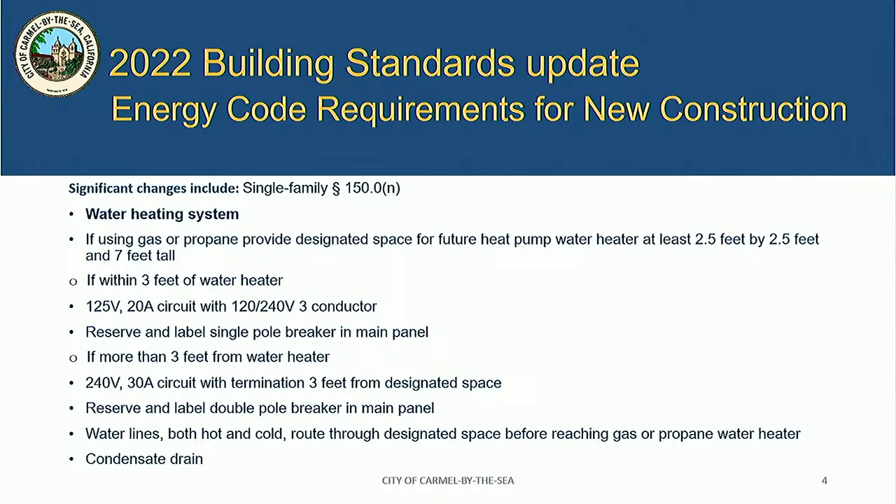This is significant because, one, if you're doing a new ADU and your current panel isn't a minimum 225 amp bus bar rating, most likely you will be required to upgrade that panel. That panel will trigger the electrical underground requirement, which I'll get into in a moment. But this is the biggest portion of the electric ready requirements.

You'll also have to install the raceway for the energy storage system, your backup battery. Backup battery isn't required upon building the project, but you do have to dedicate that space for this.

The main reason I'm bringing all this up is when you're planning your project, you have to think logistically between setbacks, window locations, because of the required setbacks for your future energy storage systems or any of the equipment installed on the property. It could really affect how you design that project.

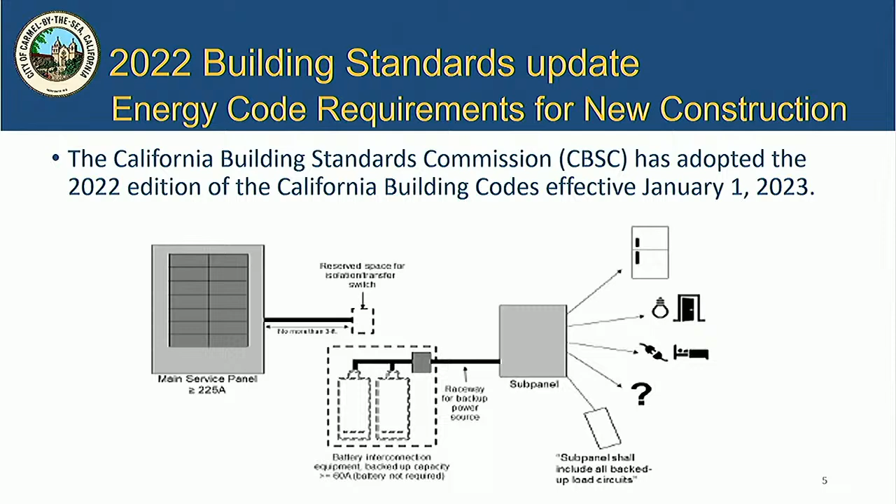And if you don't have the foresight, it could result in delays in the project if revisions have to be submitted. And we're all trying to get these projects to completion as soon as possible.

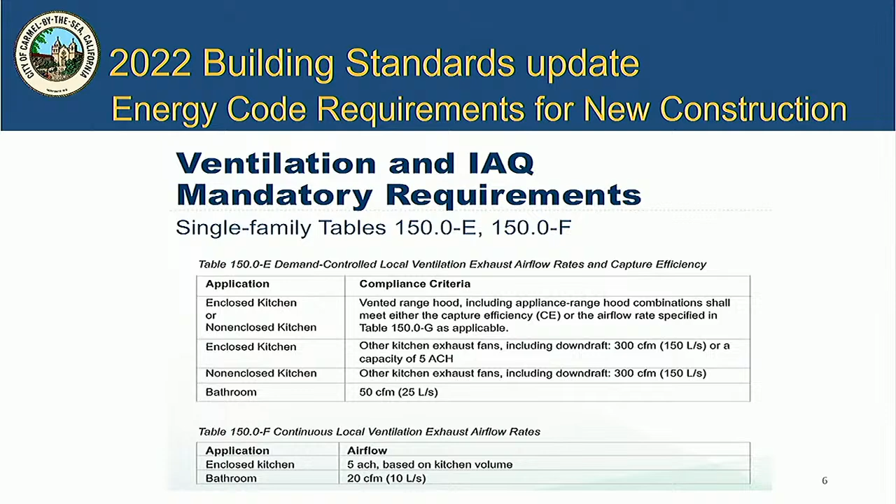This next diagram shows you, depending on your dwelling unit square footage, whether you have an electric range or a gas range, the minimum CFM or capture efficiency requirements required by the code.

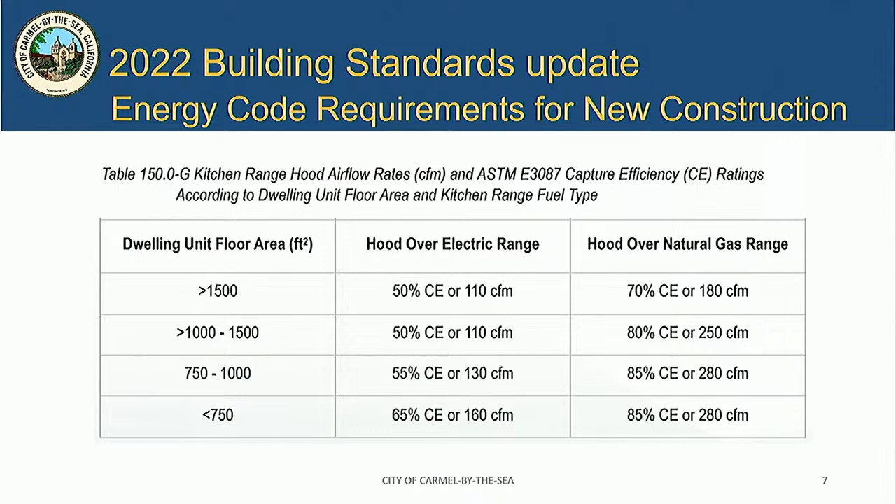So I wanted to talk about the changes. There was a change in the municipal code. This has been in effect over a year, but I did want to cover this because it more clearly defines the definition for demolition.

Previously in the past, if you're in the county, lineal wall calculations were typically calculated by the framing that's removed. I just want everybody to be aware that when we're looking at plan checks, we do the linear wall calculation by the percentage of sheetrock that is removed.

Typically, if you're removing over 50% of the sheetrock in the house, you can expect the sprinkler requirement to kick in if the residence isn't already fire sprinklered.

I'm bringing this up just so people are aware of this, because we don't want to get into the project and then cross that 50% threshold, and then have to submit a revision or start the plans for fire sprinklers, which can significantly delay that project.

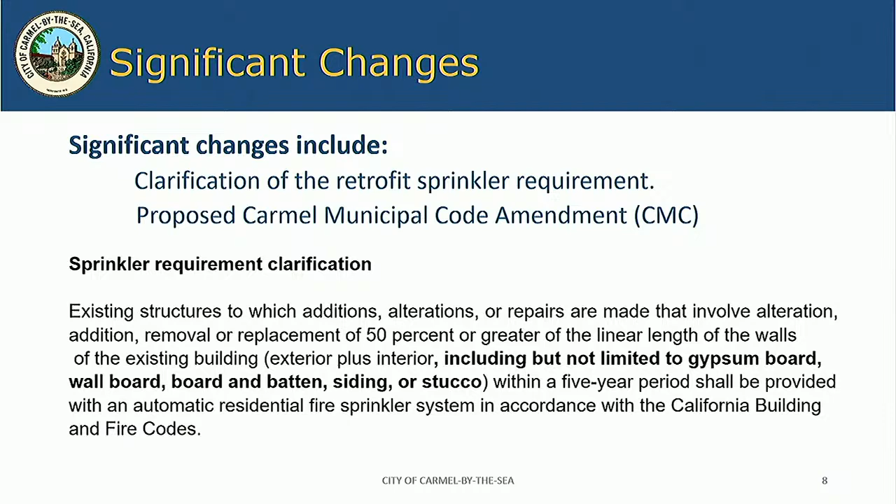There's also a change that's been in effect for over a year in the municipal code for the electrical undergrounding requirements. Really, the only change is that the $200,000 threshold that requires the electrical undergrounding. The whole code is not in here, there's a couple exceptions, but...

If you have a project and it's under $200,000, let's say you're going to do a kitchen or bath remodel and you upgrade that electrical panel. If that house is sold and the new homeowners decide they want to do a more expansive project, or even in cases I've seen the new homeowners don't like the new kitchen and bathroom, so they rip those out and redo them. If the panel has already been changed in the previous 5 years, and that kitchen bath remodel crosses the $200,000 threshold, retroactively, if that main electrical service isn't already underground, it will be required to go underground at that point.

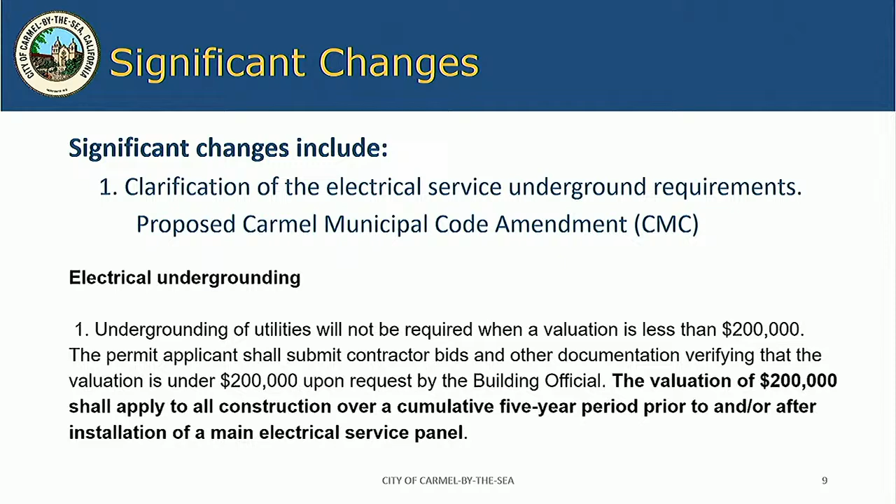Because we've been having a lot of storms lately, and this has become an annual thing, with trees coming down and storm damage needing to be repaired, we're trying to expedite these so that we can get homeowners back into their homes if they have to leave because of damage to the houses. These are the minimum requirements just to get a permit issued, so we can start getting homeowners in the process of being able to rebuild and get back in.

So at the minimum, you need a site plan, basically not a specific floor plan, but at the very least the outline of the house. If you have some structural damage or damage to a specific wall, we're just trying to identify that wall or the roof area, whatever it may be, that's damaged. And obviously providing photos always helps. That way we can get an exploratory demo permit issued.

In that process, before things are covered up or opened up, before we get to the time of rebuilding, we want to have the inspector out just to see the extent of the damage. Engineering may be required, that's a case-by-case basis. But at the end of the day, we want to have the inspector out to see the extent of the damage before we start doing the repairs.

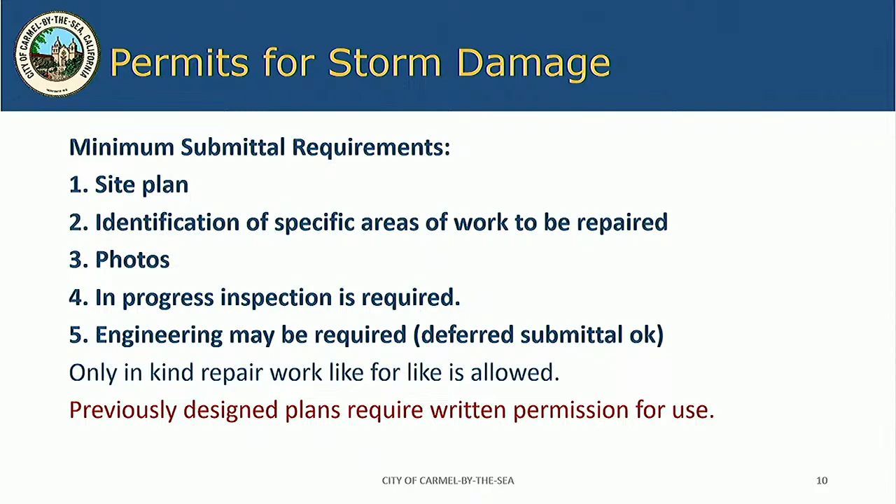Okay, now I just want to quickly go over some of the checklists that we now have available and upgraded. I have to give a lot of credit to Dwayne, he did the heavy lifting on these, but I can show you an example. I'll just do one, but we have a checklist you go through to make sure all the minimum plan submittal requirements are done.

Obviously, every job is specific, so not all the items on the checklist may be required. You can give us a call at the building department to see if something's not applicable. If you know it's not applicable, just check it and put NA on the box, whatever works best.

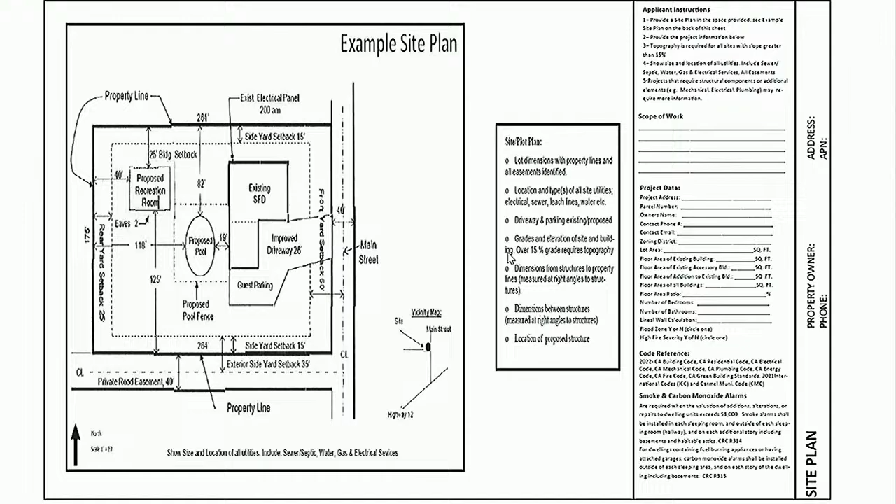At this point, I'm done with my part. I'm going to bring my inspector, Dwayne Dauphiné, up, and he's going to go over common corrections during inspections. Before we get to that section, does anybody have any questions about the content we just went over, either here in the room or on Zoom?

My name is Jerry Stepanek, local general contractor. I work closely with PG&E, and all of these electrical requirements will require a better grid. We've spoken extensively about locations where the transformers would not cover all of this. Is there any plan to start with the grid and then follow with these requirements?

So the question was about working with PG&E for power availability, since the transformers and grid aren't designed for all these requirements? Speaking with my inspector Dwayne, what we've found anecdotally is that the best way to get PG&E looking into whether they have the infrastructure is during the planning process, if there's a design study involved. That seems to make the process go faster than the typical 18 months. Once a building permit is issued, you can get ahead of that once your design study plans are approved. If you take the plans and get the engineering in to PG&E, any issues regarding power supply can be addressed sooner rather than later.

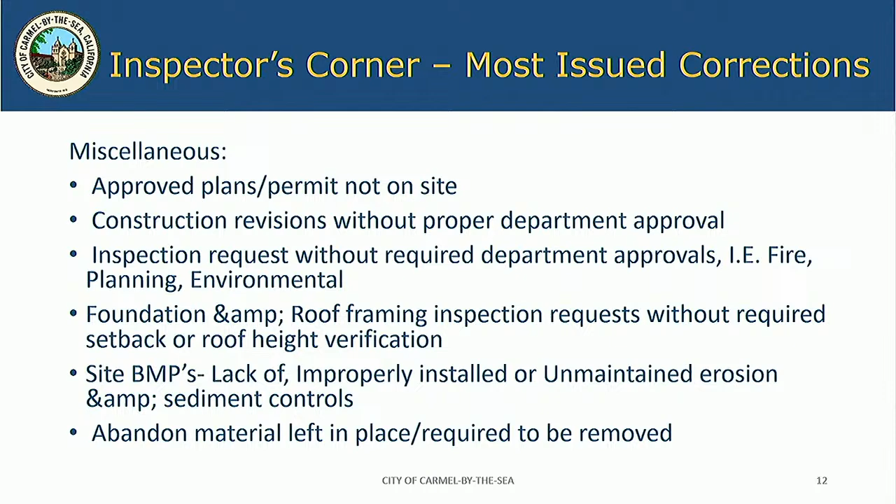And abandoned material left in place - things like old gas piping, knob and tube wiring, or just duct work. Stuff that when you're doing a project, you need to remove those items. Believe it or not, it's technically part of the building code.

Framing inspections - missing or incomplete hardware not secured. We've got to make sure all the earthquake retrofit and or hardware stuff is in place during inspection. Nuts on hardware, bolts on hardware, so forth.

Incomplete or improper installation of the fire-rated assemblies. The lots are close, are small, the houses are close together. We have some reduced setback situations that the fire and building code can mitigate, but there's certain assemblies that need to be constructed right, and we need to see those during certain times - and a lot of times that stuff's not done the way it's drawn on the plans.

Rodent protection - rats and other rodents, you don't want them going into your new building. And I see people using spray foam as a means to keep rodents out, and that is not an acceptable means. It's more like popcorn for them.

Separation and support of materials, where you have one material stacked on top of another - the materials are supposed to be independently supported and free and clear of each other.

Overnotched or overbored framing - that means if you have plumbing or ductwork going through load-bearing walls or exterior walls, and you've got huge holes drilled in them, they need to be mended together after you're done with your mechanical, electrical, plumbing work. There are approved ways of doing that, and if it's in a shear wall, your engineer needs to get involved if you're going to be notching out the plates.

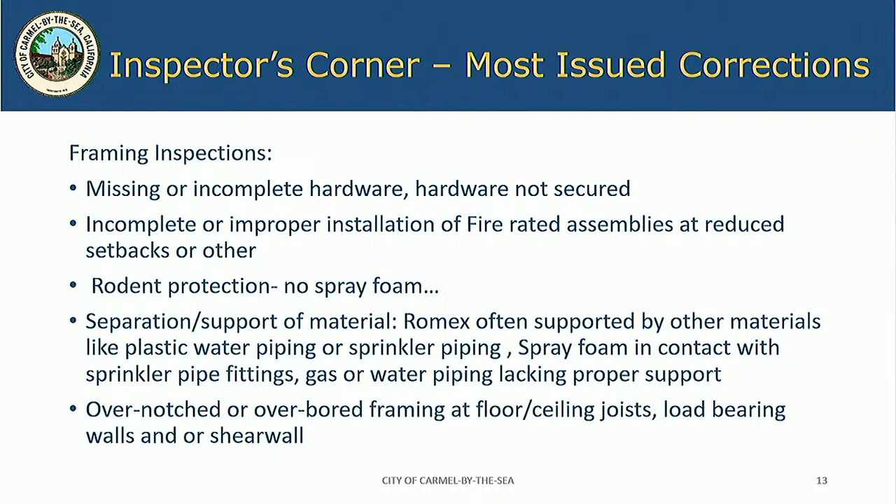What's next? Electrical inspections. Smoke and carbon monoxide alarms missing or not in the proper location. I think that's probably the most common reason I cannot final a building, because it doesn't have smoke and carbon monoxide alarms in it. It's 3 out of 10 houses. That's not good, 30% of inspections are failing because of not having smoke alarms. I really ask that we do better than that.

So everybody, when you're out there, even if you're designing or it's not your job necessarily, if you see smoke alarms missing, point it out to the people, remind them. GFCIs, that's a shock hazard plug, are missing or redundant, and we check those at the final inspection. A lot of times those are not functioning properly or redundant.

Grounding and bonding at gas, hot and cold water, that's kind of an electrician's discussion. If you want to have that, we can. Electrical panel not labeled, improper or incompatible breakers, missing some of the important equipment in the panel itself. So these are easy items to identify before your inspector gets there, to make sure things are up to speed and you can pass your inspection.

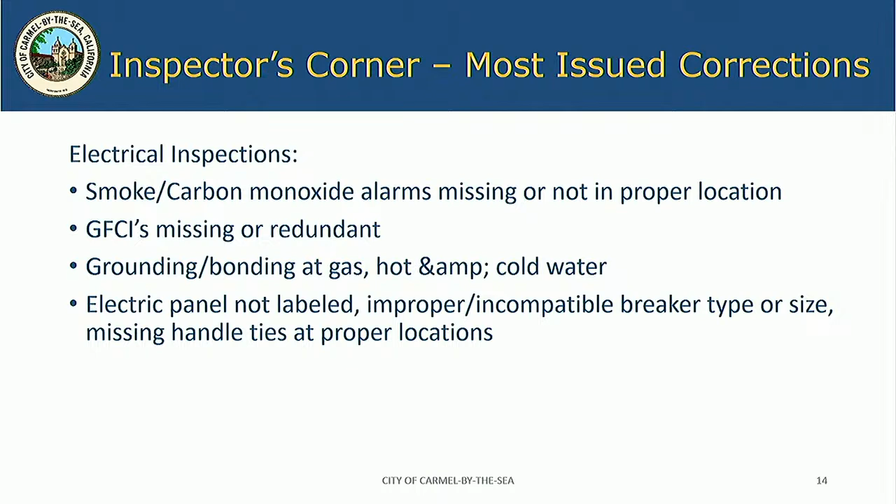Solar and ESS, energy storage systems. Do we have any solar designers or energy storage people here? These are important things. Maybe if you have someone doing this work to your house, take a look at this list. These are newer requirements that are commonly being missed out there. It's kind of in the weeds, and happy to discuss it.

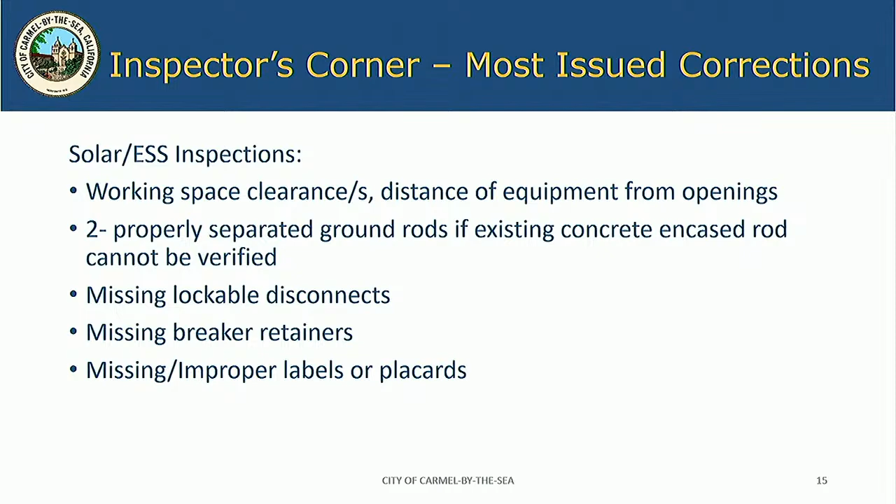Mechanical inspections, missing emergency overflow under a unit, like a hot water heater or a forced hot air system in an attic. The high efficiency units actually create sweat, and you've got to get that condensate out of the unit and out of the building properly. A lot of times that's not done right or missing.

Improper water heater venting, required through the roof and/or 10 feet from the property line. Again, the houses are close together. If you're venting a water heater out of your garage, it should not be aimed at the neighbor's bedroom window. That's sometimes tough to do because of the constraints in lot size and the building. It unfortunately sometimes requires you to open up more of the building to get the ducting through the roof, but we really do need to see that.

Ducting of interior environment fans, stuff like your range or bathroom fans, not ducted out through the building at the time of inspection.

Missing or improper materials used for ductwork support, ductwork in contact with the earth. A little while ago they made a change to the mechanical code. A lot of times you'll see metal strapping used on the ductwork. It's no longer allowed; it's supposed to be nylon or another type of material you can use. The old metal strapping is not only dangerous for the workers, it's proven to rip the ductwork and then it becomes ineffective.

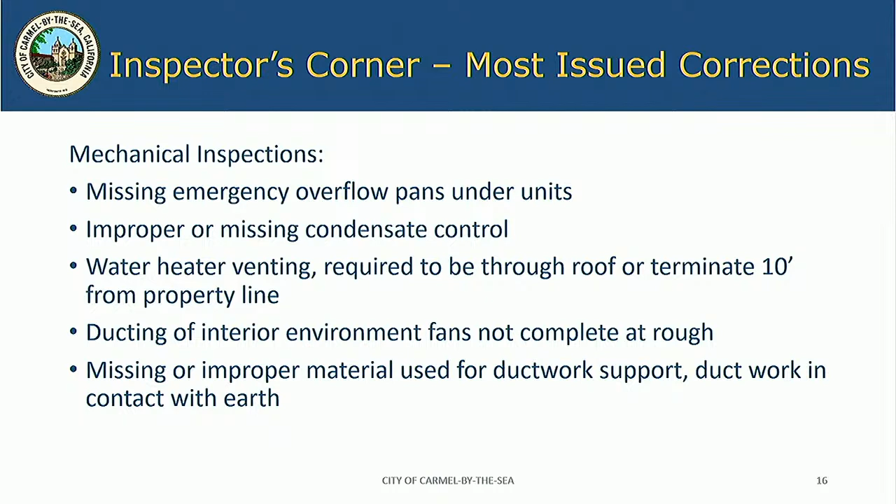Plumbing inspection, gas pressure test. The gauge is the incorrect PSI, needs the right size gauge. Damaged gauges or the test pressure not set prior to inspection. Gas pressure, a gas leak obviously is something we can't have. This is a big one for me, and the gas pressure tests seem to be something we could be doing better with.

ABS, not under hydrostatic test. That means your plastic piping in the building, the waste and vent system, has to actually be water tested before we can approve it, so that we know it does not leak.

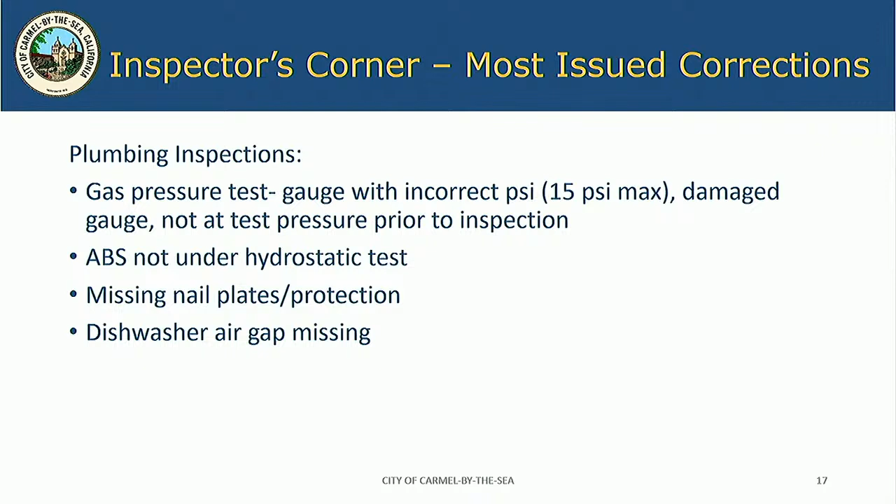Missing nail plates or protection for piping and wiring, and the dishwasher air gap. That's one I go around and around with folks on, the dishwasher air gap. I hear a lot of times the manufacturer allows it, but the IAPMO plumbing code differs from that and does require it. The way we interpret this, the building code says that if there is a conflict in the code, the more restrictive measure prevails. So that's why we ask you to do the dishwasher air gaps. I know a lot of homeowners don't like the extra stuff on their countertops, but this is how we've been enforcing it.

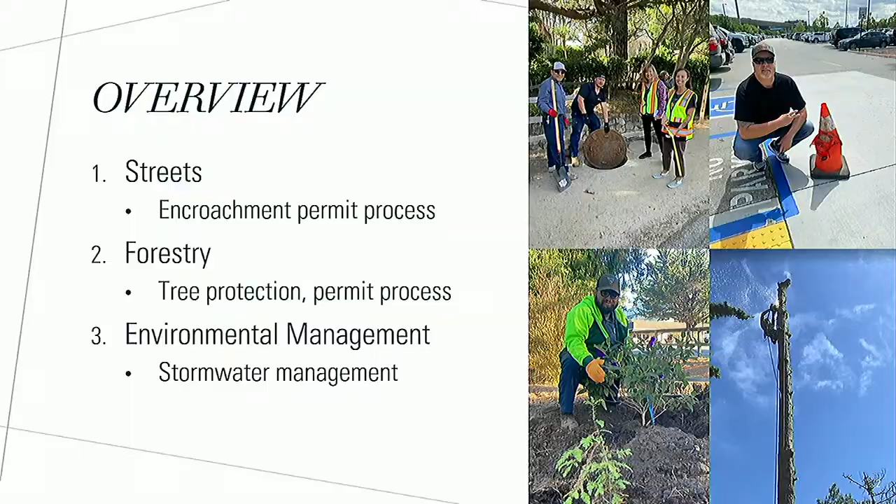Our forester does the tree permit process, and Mary will talk about the environmental permitting. An encroachment permit will be needed for any proposed work in the city right-of-way, which is from the residential property line out into the street. That would include trenching for new utilities, bell holes for sewer lateral replacements, driveway apron replacements, or the placement of a pod in the right-of-way.

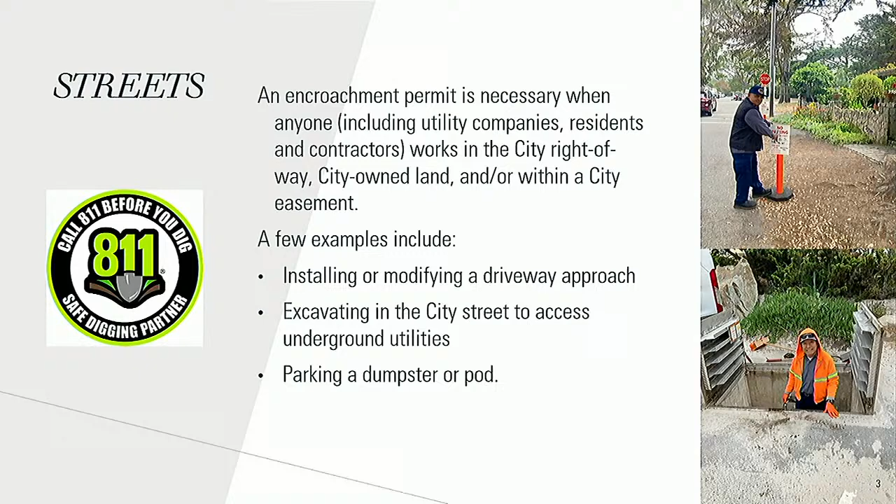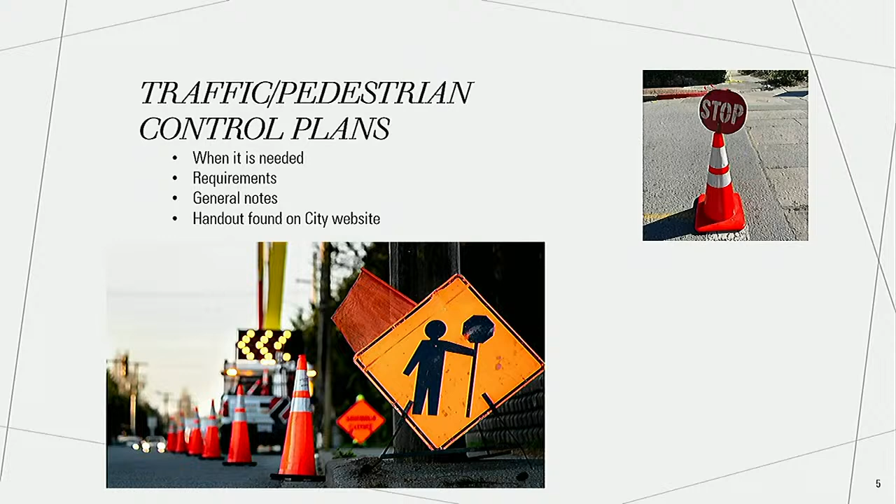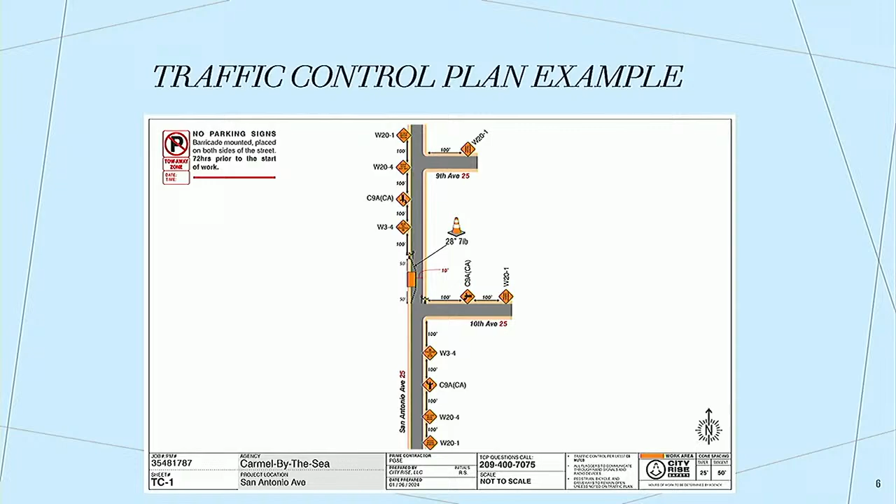That's it for streets. We do require that you give us 48 hours notice of your start date so we can make sure there's no conflicts with any other projects or events happening in the area.

An 811 or USA ticket is required, and we have handouts on the desk with the 811 requirements. For a final inspection, please email me once everything is complete in the right-of-way - wood chips covering bare dirt, your paving complete, and the removal of any tree protection.

The permanent encroachment permits require a little longer review that's done by our directors and the planning department, so that's a longer review process, but it usually works out pretty smooth. I think that's about it, if there's any questions on encroachments.

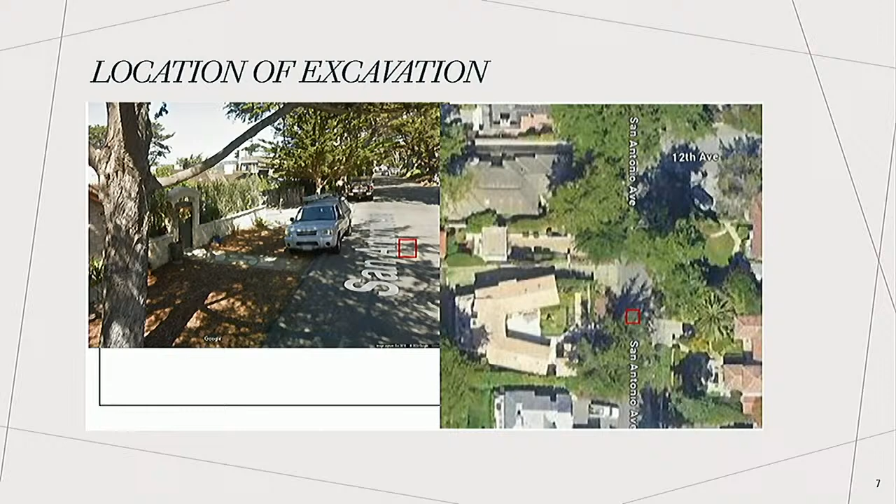Okay, and then I'll hand it over to Justin, who will talk about tree permitting. Hi everybody, I'm Justin Ono, the City Forester.

I just want to go over some stuff in terms of the permit process with trees and development, how we're trying to separate that from regular nuisance or hazard trees or dead trees, just trying to tie them into the building process and keep everything clean.

And then landscape plans - a brief overview of the most important tree protection measures, and just when and how to call out for inspections.

This happened about a month ago - we just overhauled the tree permit application. So the biggest part here that I want to focus on is that we added a part asking: is it for construction or not?

And if it is, tie this to the design study or the permit ID so we can really keep track of everything, of why the trees are coming out.

I didn't put the whole tree protection section from the code, but these are the most important ones I want to talk about.

Prior to construction, the forester will meet for a pre-site inspection, the trees should be inventoried, and we'll give a condition and significance rating, hopefully so you can take that to design around and take them into account during the design process.

It's not a requirement, but I'm trying to push for a third-party arborist assessment, someone who can keep eyes on it throughout the project, because I look at it at the beginning and sometimes not all the way until the end. It would help to have a consultant retained. Anytime something's damaged, or if you find roots approaching or over 2 inches, give me a call, send pictures, so we can figure out what to do, whether they can be cut clean or if we need to revisit the tree's viability.

The code calls for 2x4s on the trees, which has been the Carmel way for a long time. But as these projects get bigger and more expansive, if there's room — I know it's not possible with how small these lots are — I'd prefer to have tree protection fencing, so things aren't stacked around the bases of the trees, to avoid compaction of the roots. We'll look at that project by project to see what it requires, and those should stay up throughout the whole project.

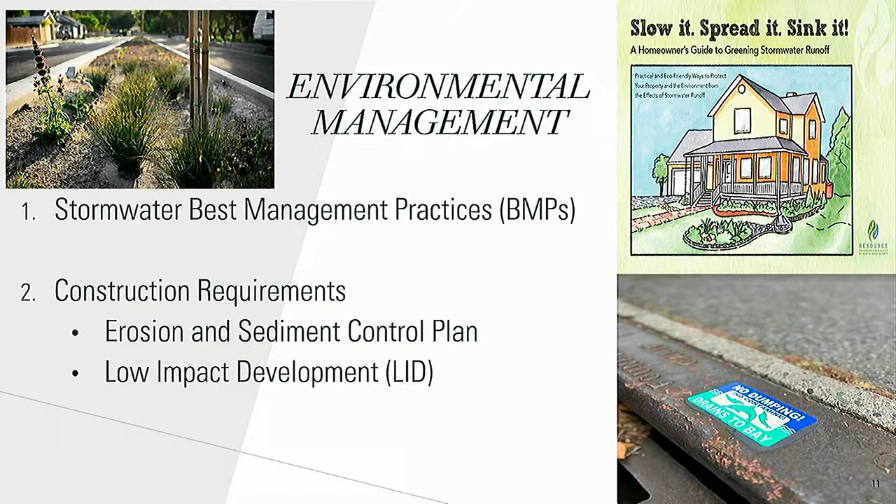The cities will schedule pre and post construction meetings to ensure compliance with these plans, and also inspect project sites during construction as well as during big storm events. With that, I'll pass it over to Javier, who's going to go over low impact development standards, and at the end we can answer any questions you may have.

Good evening, my name is Javier Hernandez, the city's project manager. As development or expansion of properties or any kind of impervious development happens to your property, we want to point you toward design guidance or operating guidance 17-07, which outlines where it triggers site development standards.

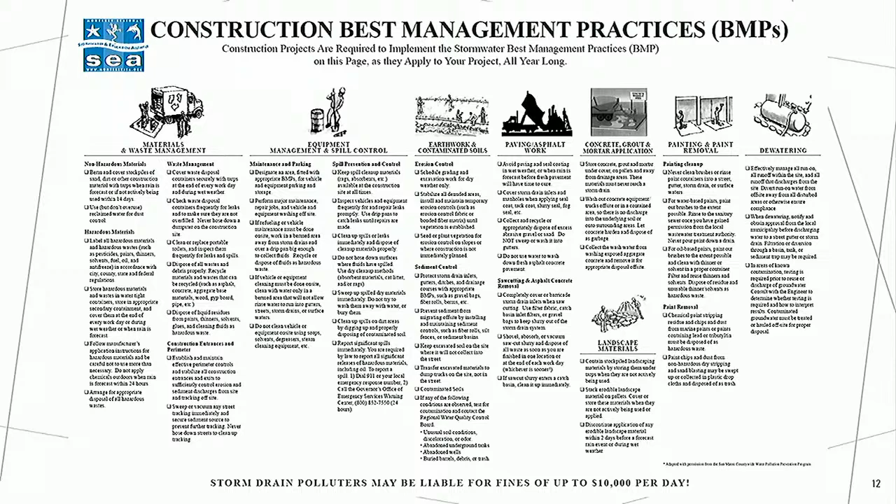Even though it's not exclusively a requirement of public works, we work as a group and get called out to different sites, so you might see any one of us when you call for one of these inspections. I think that covers stormwater.

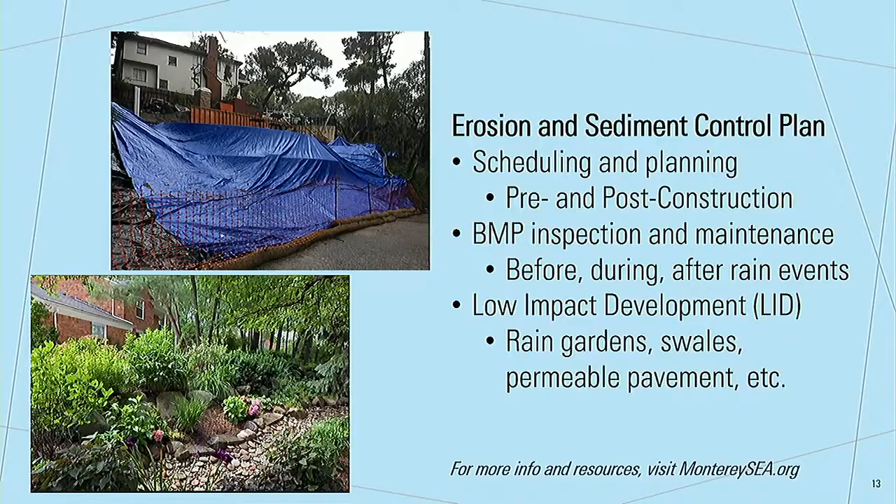If there's any questions pertaining to stormwater as development goes, now's the time to ask them. We're good?

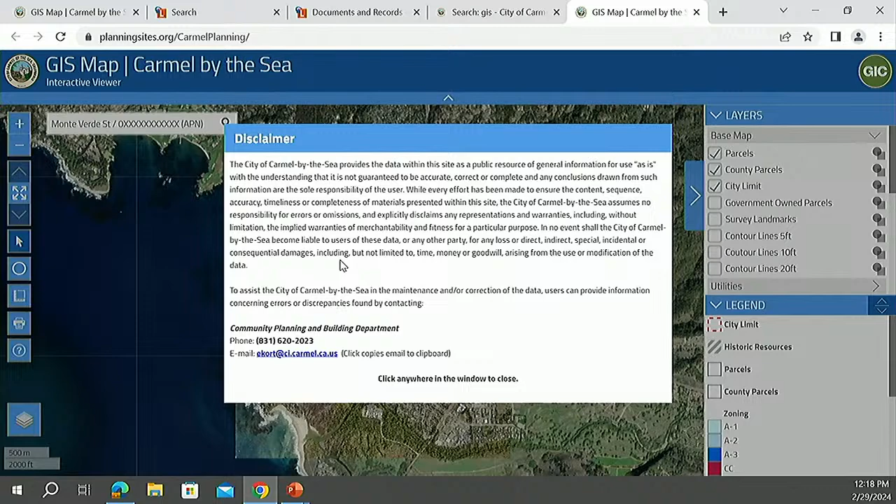If anyone has any questions about the map or has any suggestions, my contact information is right here on this little pop-up disclaimer. Once you have read this, you can just click anywhere and that will go away, and that will take you right to this homepage, or our base map.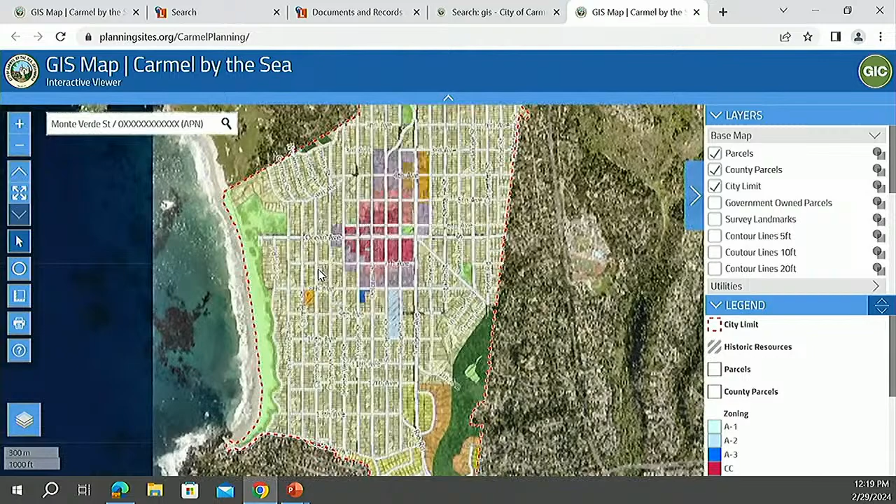I'm just going to click off each of these layers and you'll start to see this information disappear as I do this. And over here, we have a bunch of really useful tools—this is everything that we can have appear on the map.

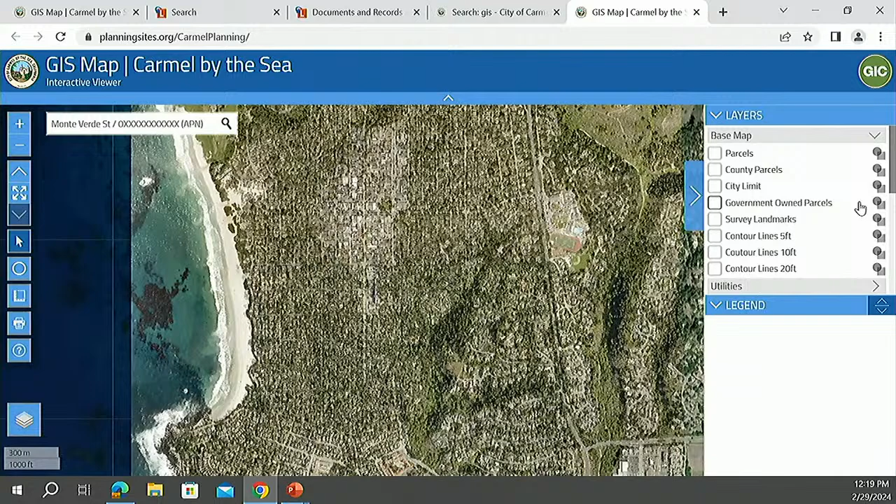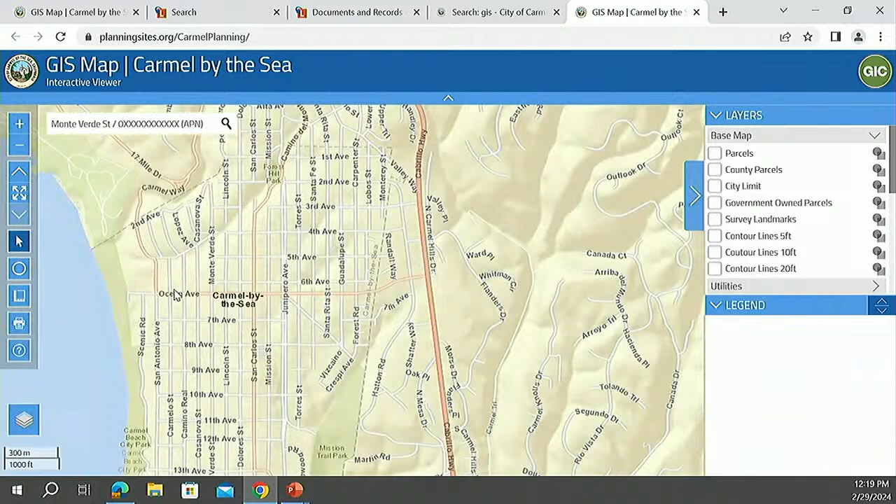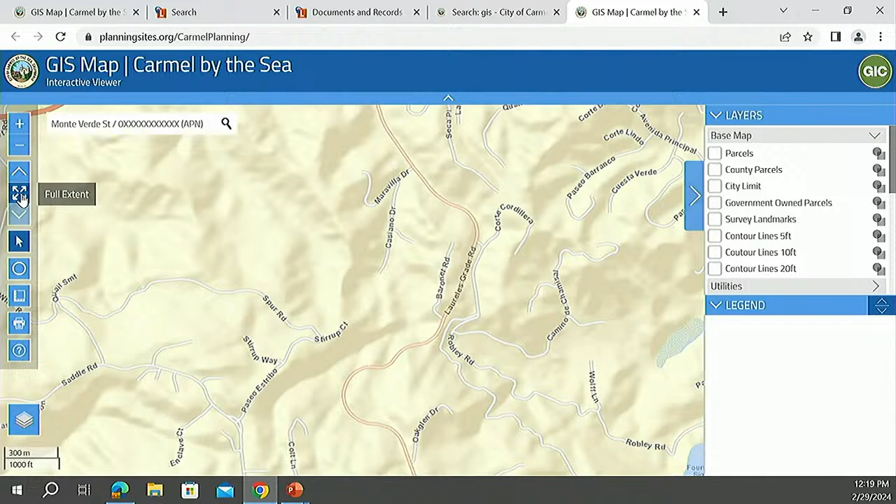Let's say you don't like looking at this image, you can change the base map to something else. This is a topographic map. That's back to the high resolution imagery. Maybe you just want something that looks a little more simple. Maybe you accidentally scroll all the way over here—if you just click this little 4 arrows, they'll take you right back to where you started.

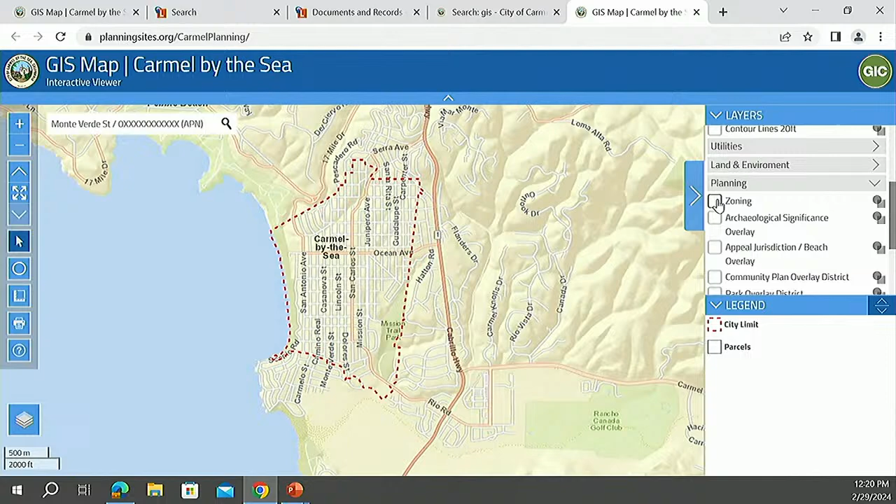So I'm just going to turn on a few of our simple layers. Actually, I'll just do this for now. So here, this is just a very simple outline—it's just our parcel map. Zoning's turned off, but I'll give you maybe just a little overview of something you maybe haven't seen before.

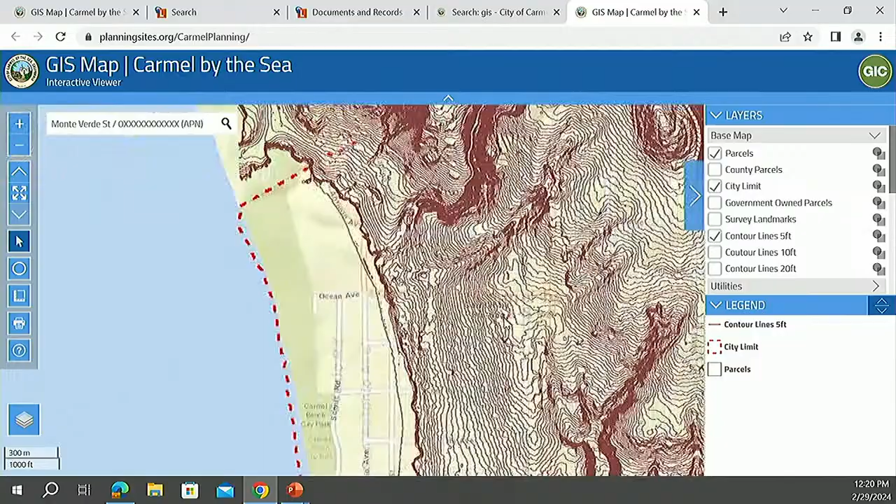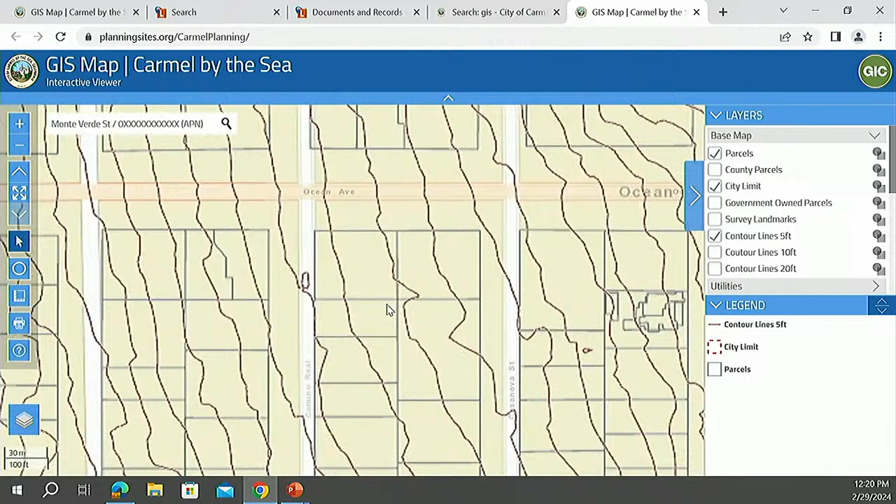This is a topographic map, shown at 5-foot contours. Maybe you're meeting early with a client on a project—they don't really know what they want to do, and they don't have a survey yet. Maybe this is their property—I'll look for a better one. This is their property. You can see they have 5, 10, about 15 feet of slope on their property running east to west.

We wouldn't use this in lieu of a survey—if you ever submit plans, we would absolutely need a survey. But you can use these contours as a rough starting point to help you develop an early concept for a project before you have them engage in getting a survey, something like that.

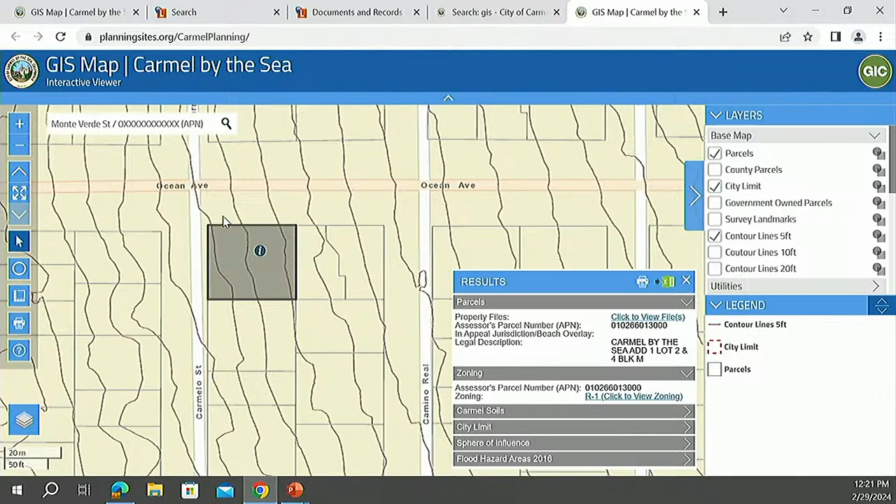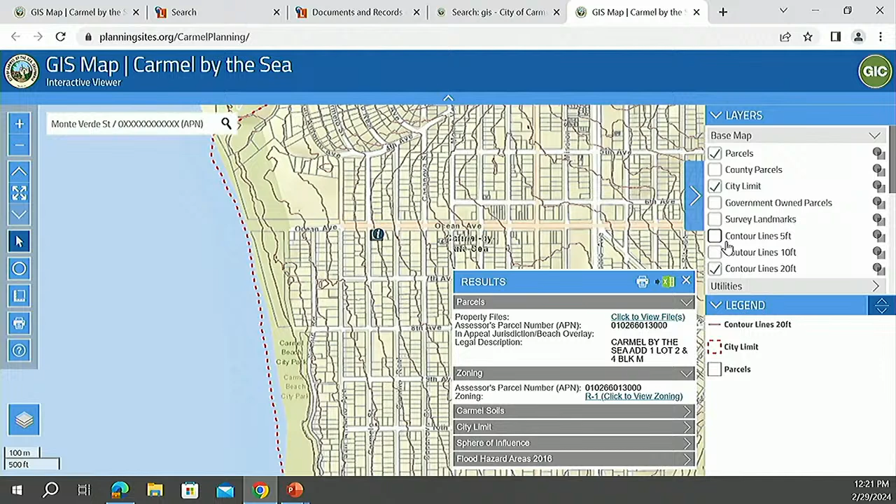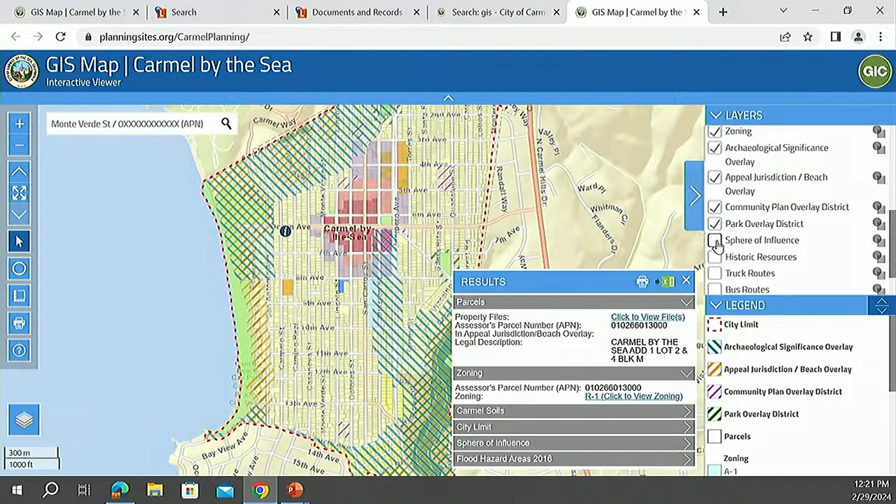We also have 5-foot, 10-foot, and 20-foot intervals. We also have our zoning layer, which is the official zoning map of the city, as well as all of our overlay districts. I'm just going through, turning on all of our overlays.

Let's say I have a project somewhere down on Scenic. I'm just going to click this random parcel. This little box will pop up and give me all the information on this property, including what the zoning is, the APN, the legal description, the base zoning, and all the overlays. So this is in the archaeological overlay and the beach overlay.

It gives me the soil type. So if you have that handout that says SOG 1707, private stormwater something, I'm blanking on what it's called, but you can see that it's in soil group A. That's what Javier was referring to, whether you need the engineered drainage or not.

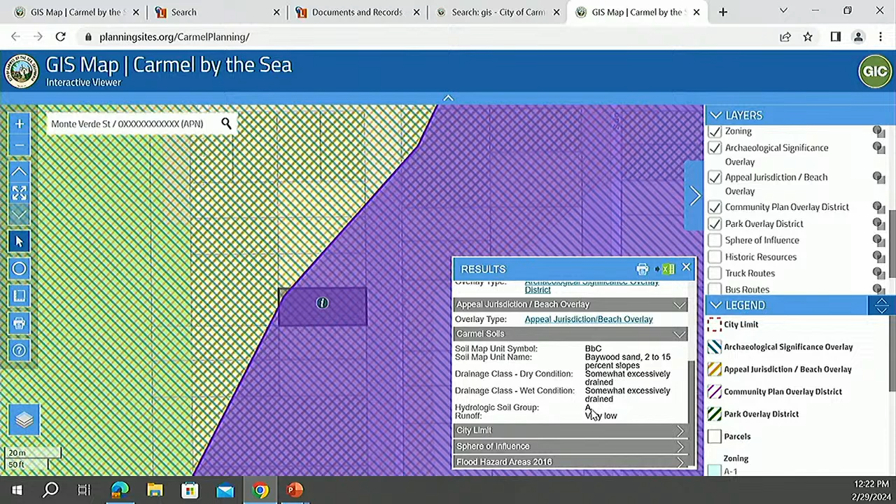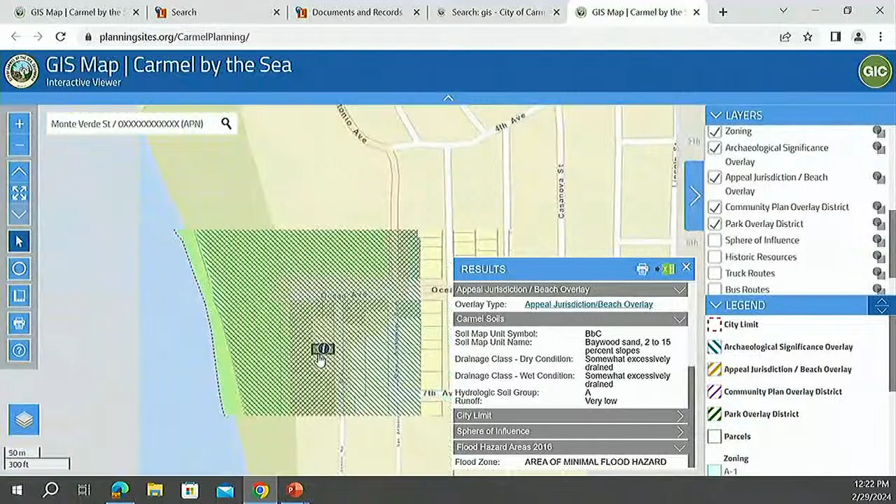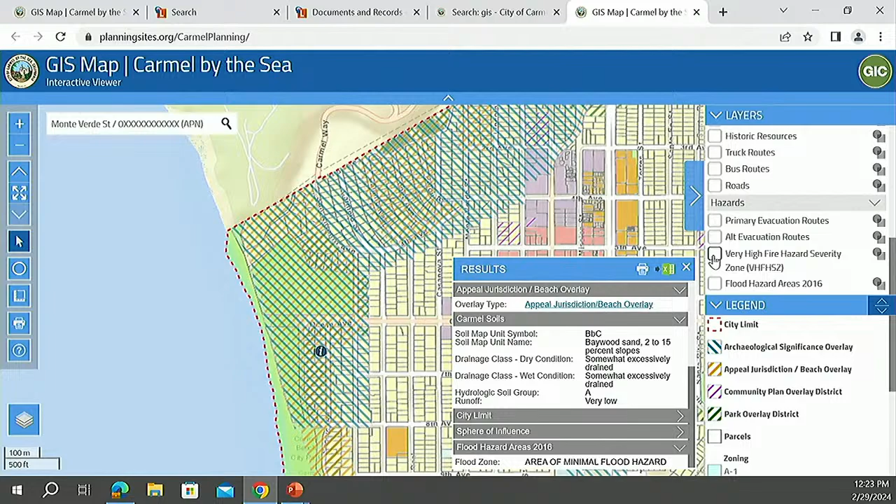And then also if you are in a flood hazard area. This one isn't a great example. I guess we have one more overlay that's important to know about, which is our very high fire hazard severity zone. If I turn this on and off, you can see this one is not in the very high fire hazard zone, but we have properties up here that are, as well as over on the east side of town. But if it were in that fire hazard zone, we'd have an additional notification down here.

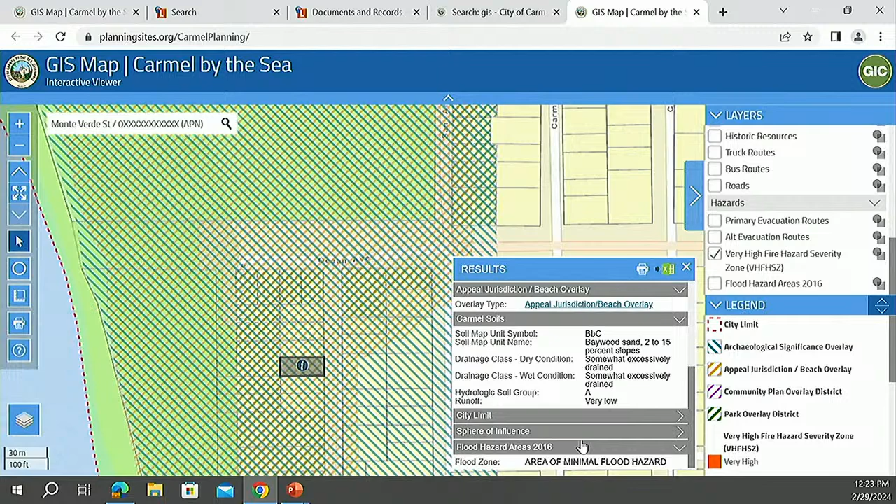You can hit this little printer here and have this parcel report printed that you can include in your plans if you wanted to. And let's say you've never done a project in these overlays, you can click this link and it'll take you right to the zoning code section where you can see all the information on that project.

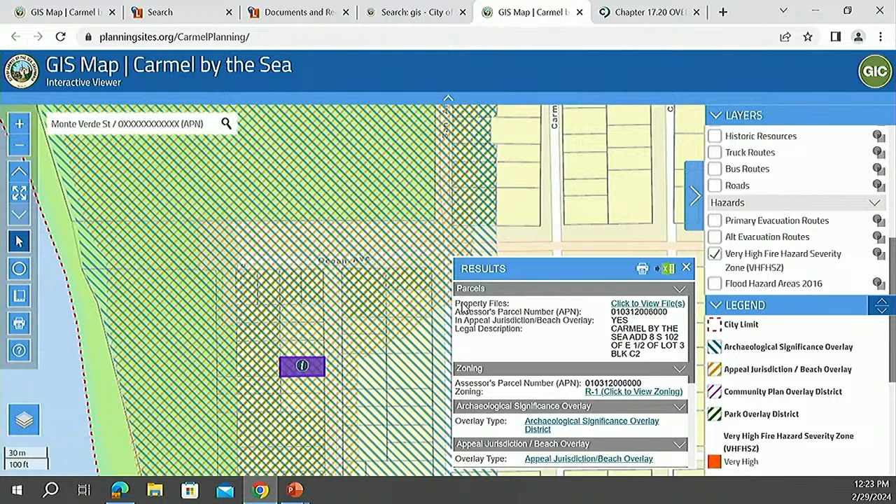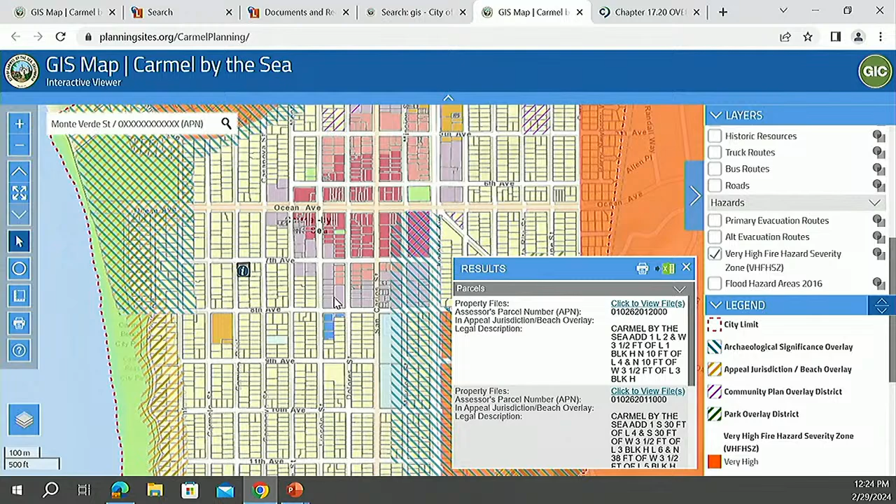Going back to the map, really the bread and butter of our map here is under property files. So any property in the city, you can just click it and you're going to get this same results field down here. I think I accidentally clicked multiple properties there, but I'm going to go ahead and click City Hall.

You can also search by APN in the top if you know your APN, but I'm just navigating by clicking on the property I want. I can click to view property files, and this will take me to our document repository. If you remember back a couple years ago, we had filing cabinets upon filing cabinets of physical files back in our office, and you could come in, request the property file, sit down and go through stacks of paper. Those are all scanned now and digital.

So I just click that link, and I don't think that's City Hall, but I can still use this one. So for whatever property I just clicked, this is that scanned property file. The really cool thing about this is it's keyword searchable.

So if I just do a Control F, I can search for, let's try, permit. And it just came up with 47 matches for the word permit. I can just go through and it hits it every time.

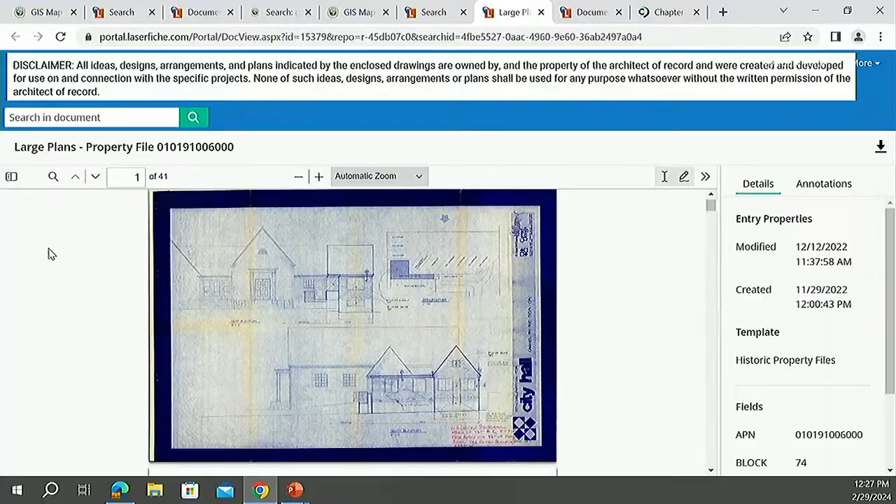So at this point, are all the files that the city had in the archives, have they all been scanned? Yes, so everything has been scanned.

They are tied in by APN, and what we've been noticing is sometimes APNs have been changed over time. So if you click the map, it will be a newer APN, which is sometimes different from the old APN referenced on the property file. So if you click a property and it says no results found, just let us know.

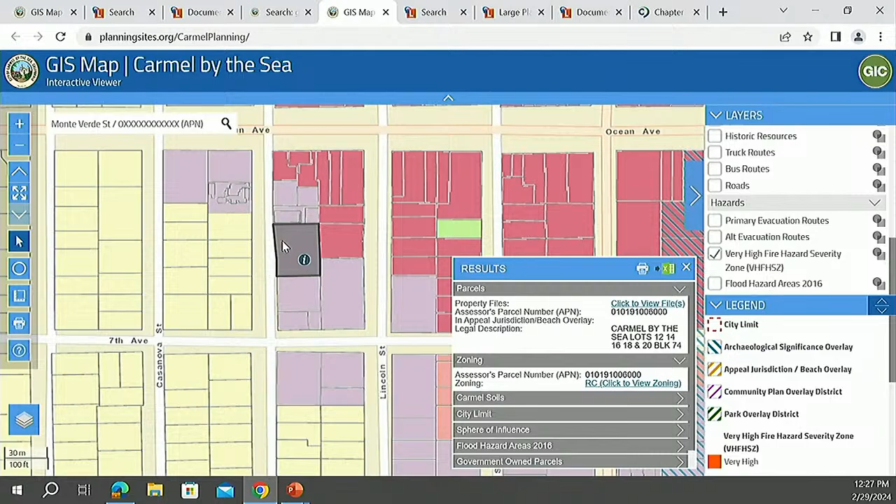Yeah, that was my follow-up question. So if there is a property you've clicked on the map and it doesn't show results, we can let you know, or we can type in a reference of a previous APN into the search bar. That's what we would need to do to make that fix and make that connection. Got it. Great, thank you.

Any other questions? But GIS, ADUs? Yeah. Years ago, there was talk about locating all the trees in Carmel on the GIS. Has that been done? I think Justin can maybe speak to that.

The city trees are not on the GIS, we use a separate software called TreeKeeper, but Davey Tree just completed their citywide inventory of trees. And that's just in the right-of-way, correct? Yes, and some parks, but mostly just the right-of-ways.

So we're going to be streamlining it for the public, so it's not editable, and we're going to put that on the website so you can see all of the city's 10,000 trees.

Great, but you can't reference them through this process, correct? No, it's a separate software. There would be too much on this. It's a different GIS through Davey Resource Group. We can see if there's a way to share that information, but it's not currently available right now. Thank you.

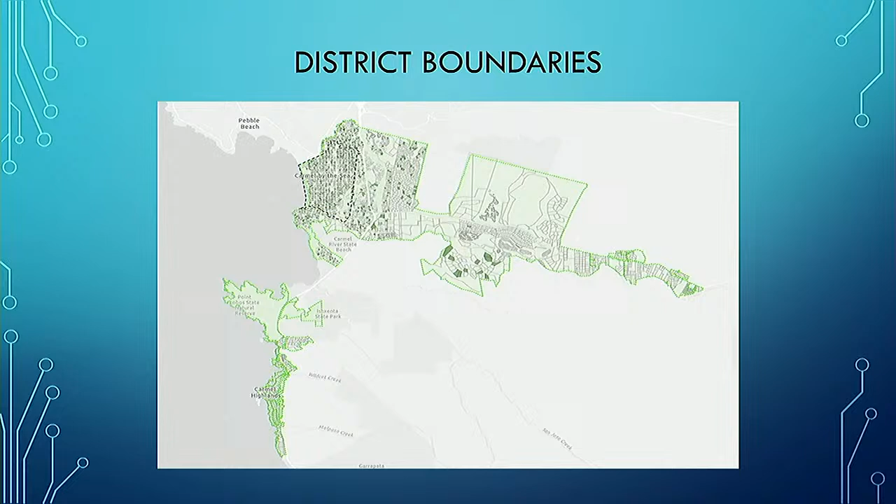The reason we have this private sewer lateral program, which is why the contractors are here, is aging infrastructure. We talked a bit about that. There's also infiltration and inflow. Infiltration is when the ground's wet and you have holes, cracks, or leaks that let water bleed into the sewer lines. Inflow is when you have a direct connection from a rain gutter or some man-made device that purposely puts rainwater into the sewer. Rainwater is a no-no into the sewer.

As an example, this year, last month, our normal dry weather flows are about 1.1 million gallons. We had over 4 million gallons coming into the sewer plant during the rains. A few years back we had 1.8 million coming in during some large rain events. That means we're treating rainwater, and that's not what we're designed to do. Part of this lateral replacement program is to cut back on inflow and infiltration, since the pipes aren't designed to have that much flow coming into them. Then we get sanitary sewer overflows, which is a big no-no.

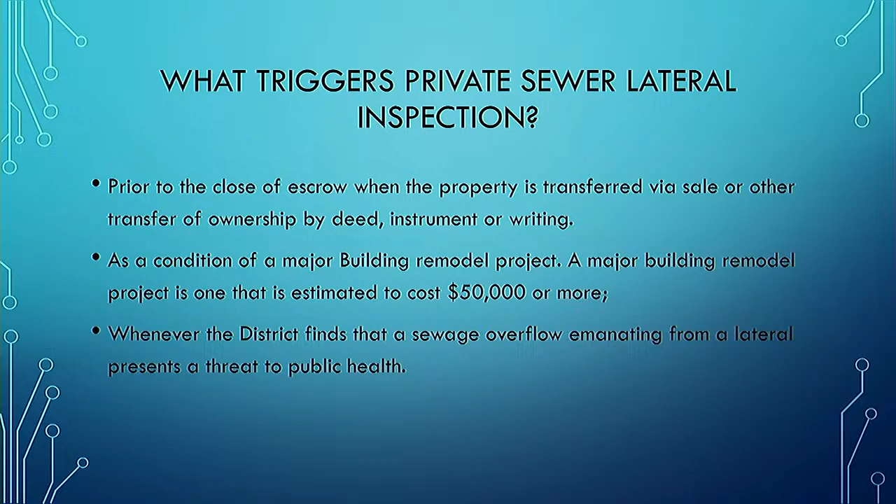What triggers a private sewer lateral inspection? Close of escrow, or change of ownership, has kind of been the leading one lately. Our board approved this in 2019, so it's been in effect since then. PG and Monterey have had this for a while too. So: change of ownership, a remodel of $50,000 or more, which is probably more applicable to the contractors here, and also if a private lateral has overflowed onto a street and is running down the street, we get the opportunity to put a camera in and see why it overflowed.

Here are a few requirements for a sewer lateral inspection. Again, what we're asking for is an inspection — it doesn't necessarily mean you don't already have the proper devices. We look for a clean-out with a sewer relief valve. A lot of you might see the old Carmel traps; those are being taken out. A sewer relief valve is the little popper on top. We also look for a backwater device that prevents the sewer from the main line ever backing up into the house, and for a maintenance-free 4-inch lateral line.

A couple of materials are no longer allowed and are automatic failures: cast iron and Orangeburg pipe. Displaced joints — basically bad offset joints — allow water in and cause future problems. Roots are also an issue, like the trees in Carmel, which are a big problem for laterals. Then there's the factory wye: if you have a pipe going down, a Y connection is where it comes in from the street and connects like that. It kind of looks like an upside-down Y or a right-side-up Y.

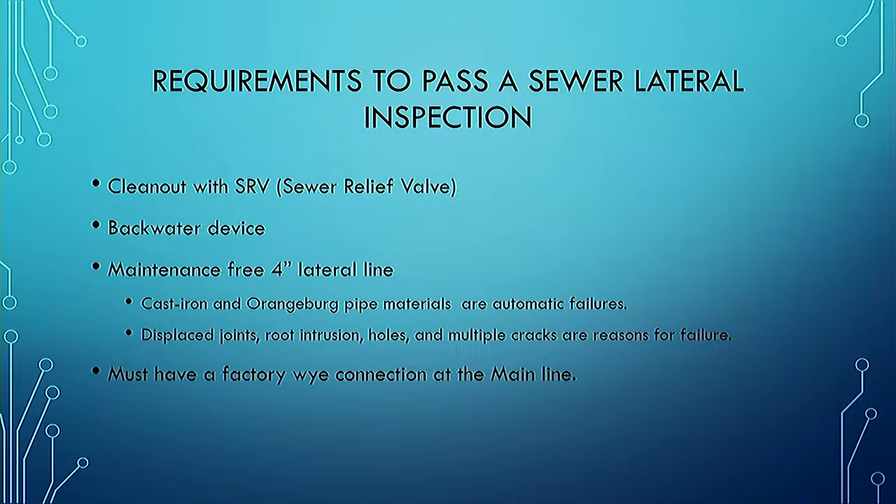I'll probably say a few of the connections that we've seen, the plumbers have done. What's in the older days is called a hammer tap - they come in, break a little hole there, put the pipe in, jam the pipe in there, big ball of concrete, and everybody's having problems. Fast forward 60, 70, 80, 100 years to where we're at right now.

Basically you have a licensed plumber go out and perform an inspection using a camera. The plumbers will submit the inspection report that can be found on our website - I apologize it's not up there, but it's Carmel Area Wastewater District. If you want to go to our website, cawd.org, just type in Carmel Wastewater District, you'll find us.

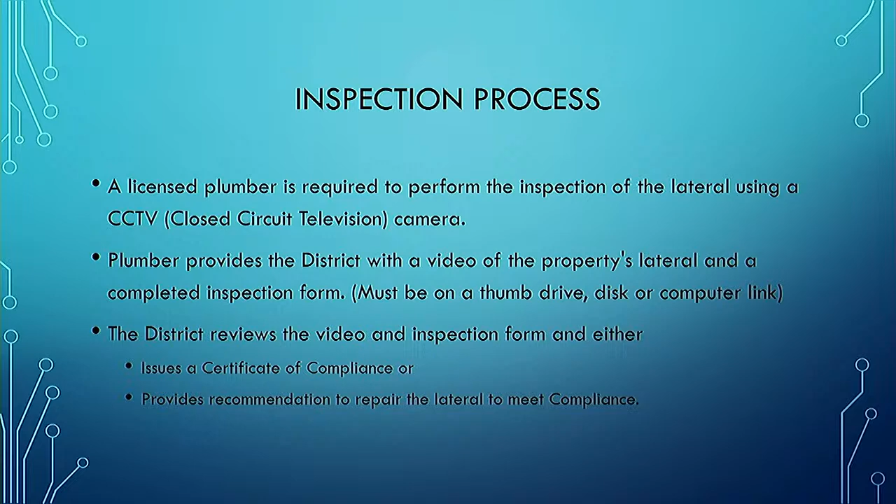And then we'll review it. Ultimately, what you're looking for, and that includes the builders - we are on the City of Carmel's final permit, there's a box that says COC. You're looking for that right there, that certificate of compliance. That means you've had an inspection done and you meet the requirements.

So we generally don't have jurisdiction inside of buildings except for one thing: food establishments, restaurants. Any drain that goes down must go through an interceptor or some sort of grease trap. So if you're doing restaurants, please keep us in mind that we're going to be requiring grease interceptors or grease traps on any drains that go down the ground, to prevent the grease from entering the sewer lines.

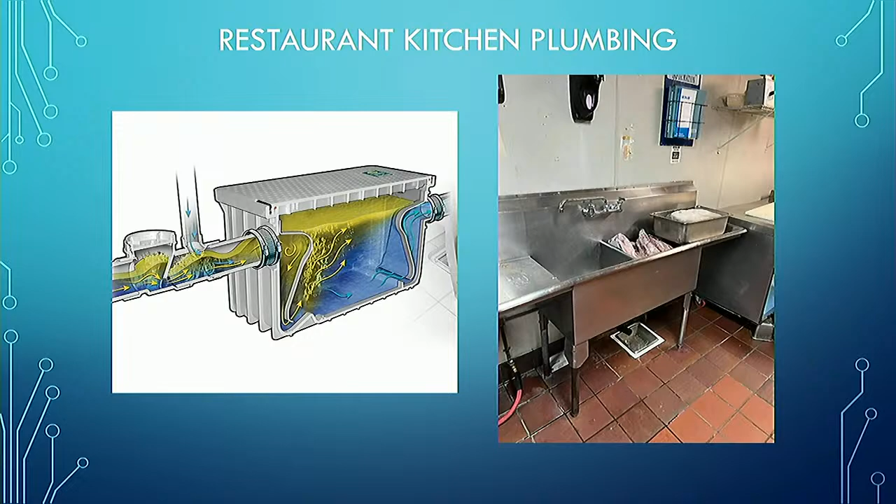And the last thing is, like you guys, we also have aging infrastructure, so we have some big projects coming up over the next few years here, replacing some sewer lines. So you're going to see us out in the streets replacing sewer lines. Any questions?

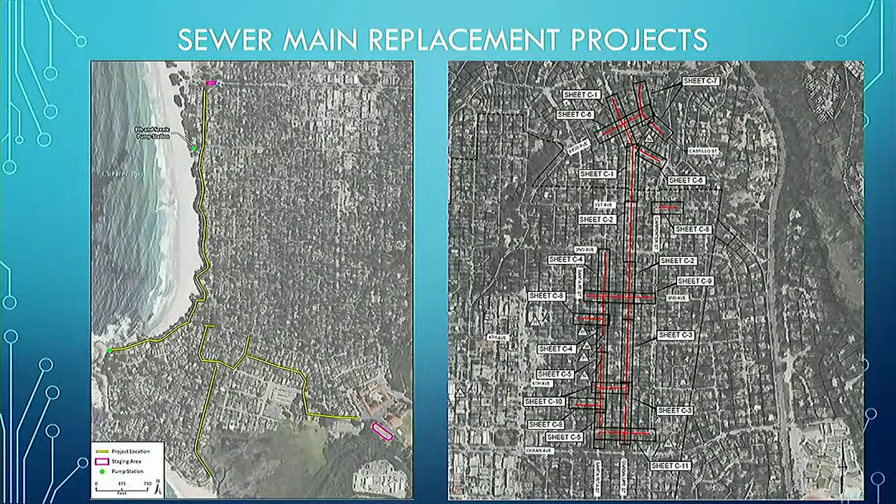We also love a good GIS as well, by the way. Really cool stuff. Thanks.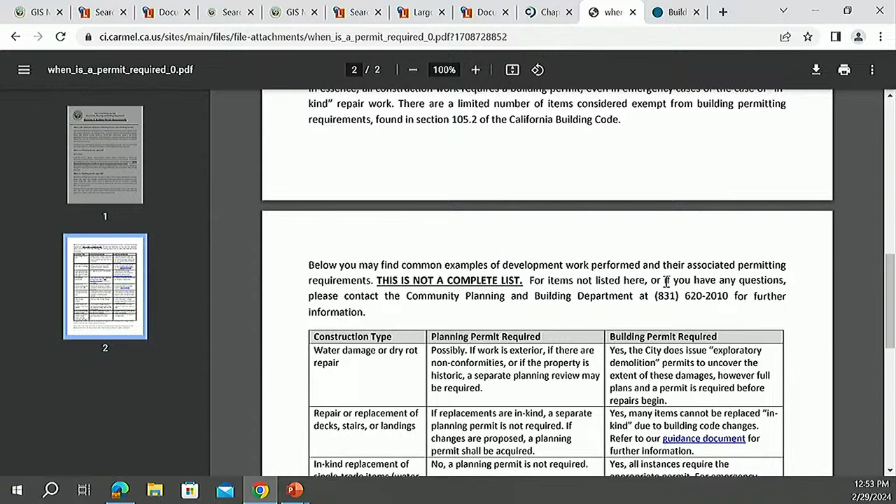We have linked as much information as possible into our guidance documents to try to hand that out, and it does give a broad overview. It does not cover every single project type, but this should give you a good idea of what you're looking at, whether you require a planning permit and a building permit, or either or both. And again, if it's not listed, feel free to contact our department, our contact information is available here. There is also a disclaimer: some of these conditions may change if you are working with historic properties, and those you will need to consult directly with the planner on.

The last item I wanted to show off for our online system is that not only can you submit an application through our website, you can do a status check. We get a lot of emails saying, hey, where's my project? Sometimes when you submit something it feels like you have no idea where it went—is it in a black hole? We're trying to make sure you stay updated and keep on top of what's happening with your plans and project.

So whether you've submitted a building, planning, tree, or encroachment application, you can go onto our website and do this search. This option is available for each project type, so that you can find out where your project is in status. There are a couple different ways that you can search for your project, whether you have the permit number or the parcel number, and I'm going to bring up an example of one right now.